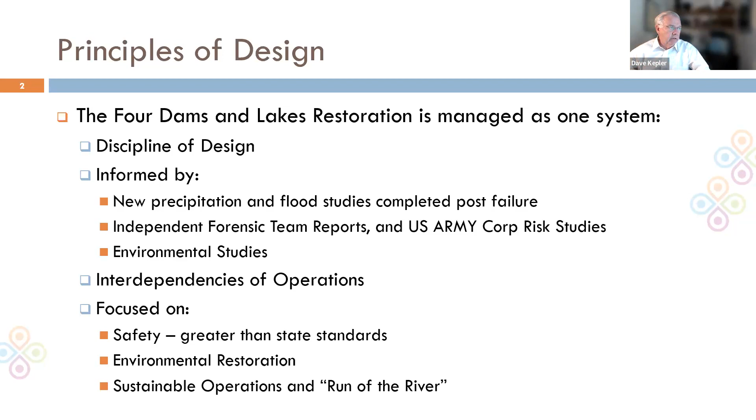The next slide shows the kind of timeline—for those who have been at our webcasts, you've seen those. We've spent the first 2 years in parallel doing both the design and a significant amount of recovery.

During that period, almost over $57 million were spent. We were doing the design as we were doing this management of recovery. That recovery phase is fundamentally done. The engineering is fundamentally done on actually all 4 dams now.

We are in the process of permitting, both Edenville and Sanford are nearing completion. Sanford is for sure, and we're submitting that, have been submitted. The other 2 dams are actually permitted and under construction. Currently we're looking at Secord and Smallwood to be under construction now, to be complete by the end of 2024, and we're looking for Sanford Dam and Edenville Dam to start this year.

Sanford is full restoration permitting right now. In Edenville we have some issues around endangered species and how the floodplain gets reported through FEMA, that it's still not all there, but we are doing the embankment, the things that relate to dam safety embankment this year, so we can be ready to pull that project. So it's the one that has a little bit more uncertainty of when it will be implemented, but if all goes well, we're trying to get that implemented by the end of 2025 or close to it as well.

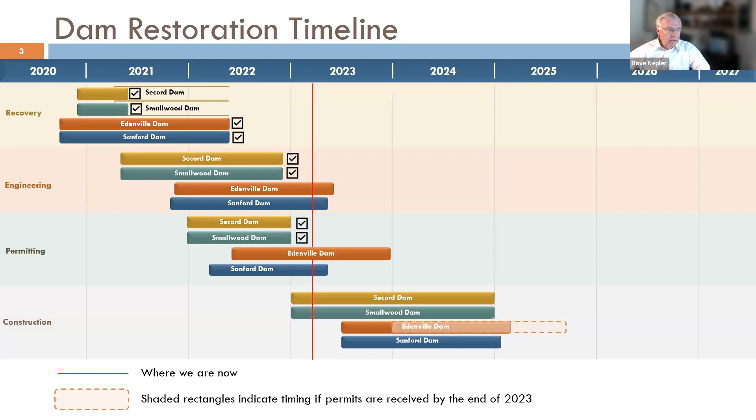So that's kind of where we are on the project. I think that's just to give you a perspective of why we're talking to you today as it relates to Sanford. And with that, I'll pass it over to Carlin, who's going to kind of cover the dam safety aspects and how we design the dams.

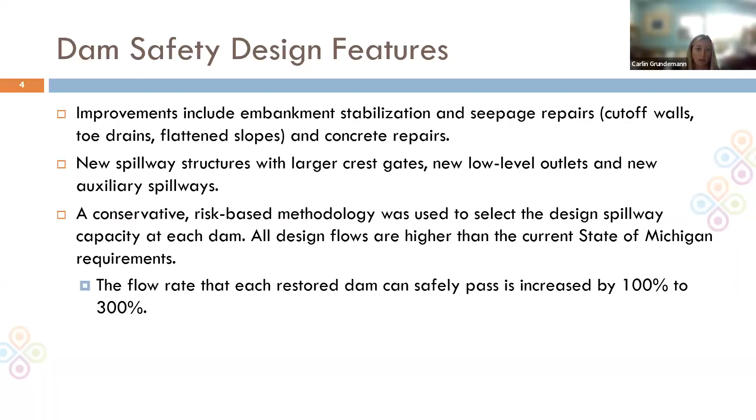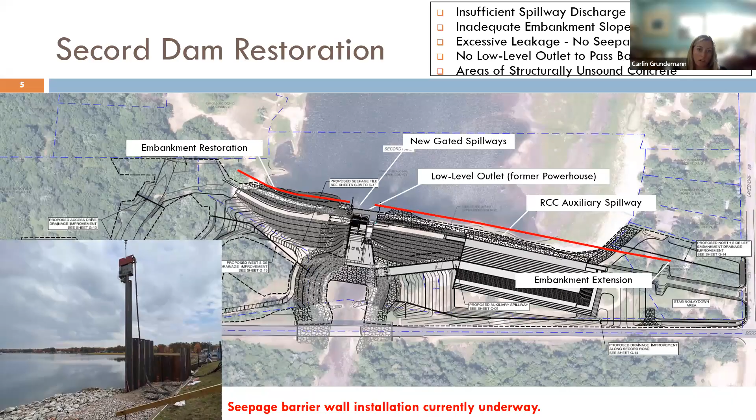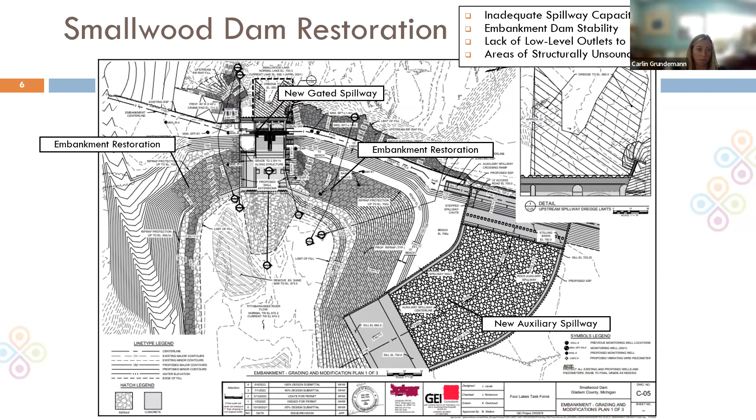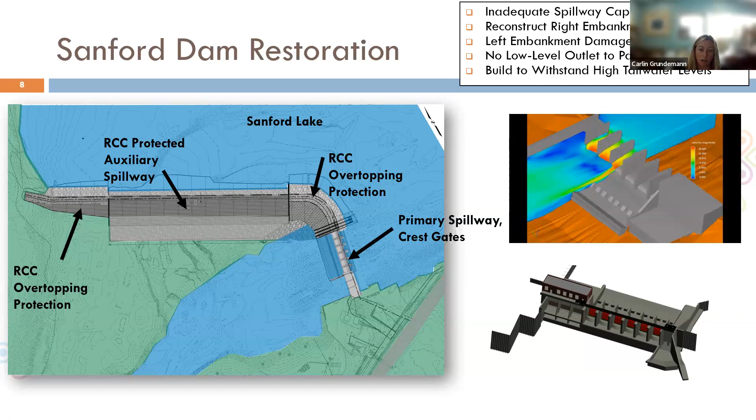I think I mentioned over the low level outlets here already. Yeah, so you can go to this. Yeah, that's okay. You can go back to that slide, this next one here.

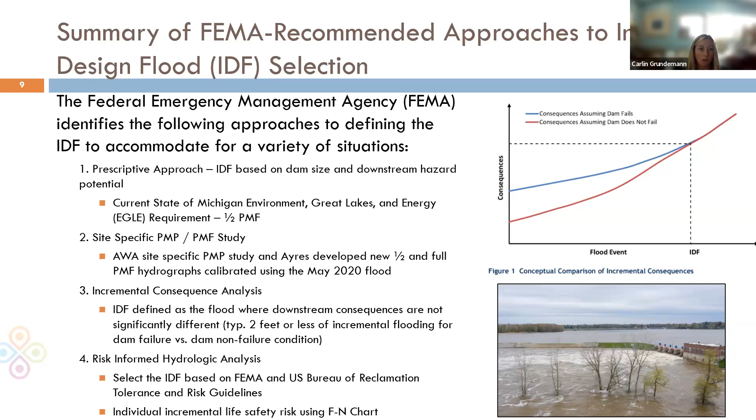So go ahead to the next slide here.

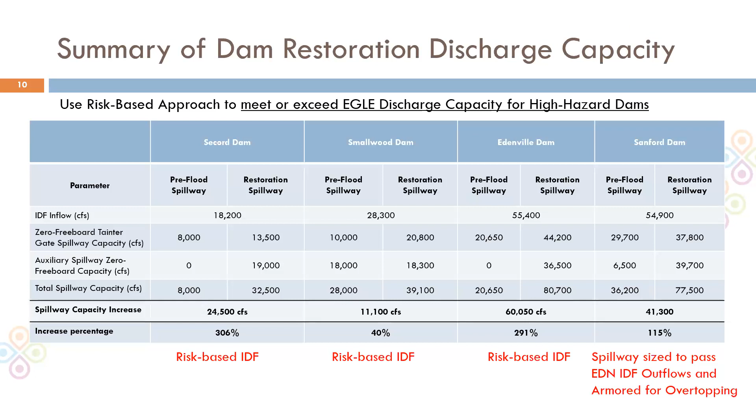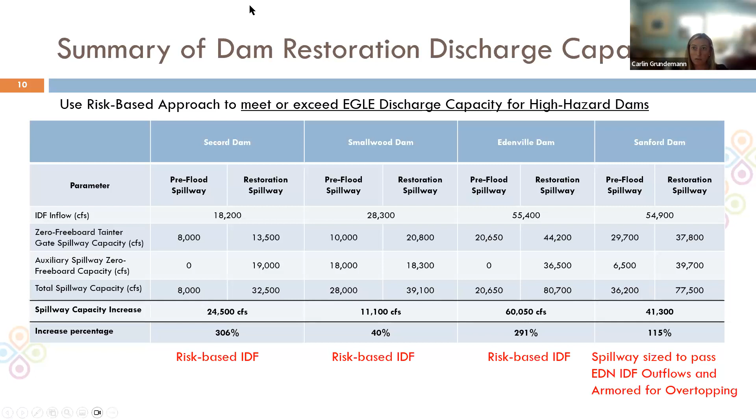The inflow design flood, Carlin covered pretty well. The next part of this that we want to talk about specifically is the floodplain portion. So when we say floodplain here, we're generally referring to the 100-year floodplain. That's the land that would be inundated by a flood event that occurs on average once every 100 years. Essentially, that's a 1% chance storm that would happen, so it's a 1% chance in any given year.

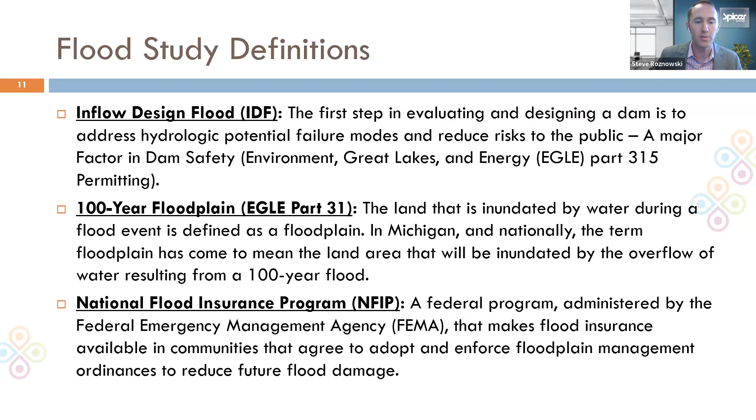We also have a definition here for the National Flood Insurance Program. This is the federal program that FEMA administers, and this is the program that generates those flood maps. So if you've seen a 100-year flood map, that's the program that generates those. So just a couple terms we'll be talking about here.

Want to get into a little bit of past flood studies and the flow rates we've evaluated here. There are two different tables here. The top table is for the PMF, the probable maximum flood. What we're trying to demonstrate here is there's three different studies that we've referenced: a 1994 study, a 2011 study, and a new 2021 study. That new 2021 study that Ayres and Associates produced includes flow information from the 2014, 2017, and 2020 floods. That information informs that there's a higher probable maximum flood based on the statistical analysis from those newer, larger storm events. So you're seeing an increase in that probable maximum flood calculation at each of those four dams.

On the second table, the bottom table here, we look specifically at the 100-year storm on those top two. Prior to the flood event in 2020, the published 100-year storms for each of those dams is listed: Secord, Smallwood, Edenville, and Sanford. And then the 100-year flow rate based on that new statistical analysis that Ayres and Associates did following the 2020 flood. And I'll point out in this next row, Edenville in particular, there is an estimate of the May 2020 flow rate that resulted in that Edenville failure was roughly equivalent to the 100-year storm. Downstream of that, the flow rates that were seen at Sanford Dam were closer to the 500-year storm as a result of the breach wave and the failure of the Edenville Dam upstream.

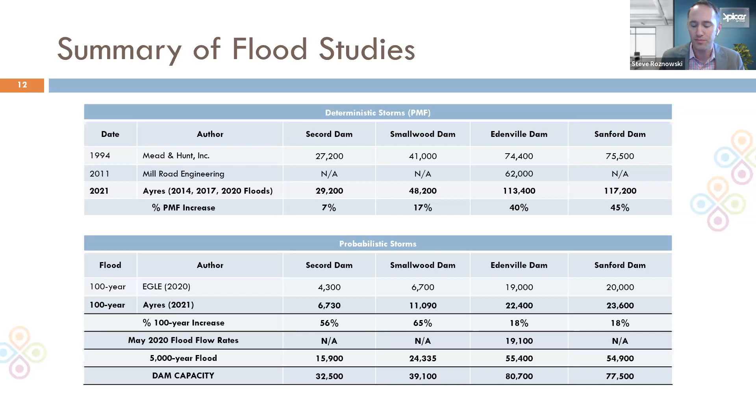So next, I want to talk a little bit specifically about Sanford Dam, primarily because, one, that's the most downstream dam, and two, that's the dam that's currently being permitted next through EGLE.

Looking at the flow rates coming out of Sanford Dam, we did do an analysis of what those flow rates would look like if the dams are installed as designed, these new safer dams that have this additional capacity, versus what it would look like if the dams were not reconstructed. Really, those are the 2 options that we have to look at. We can either create a safe dam or not install a dam at all.

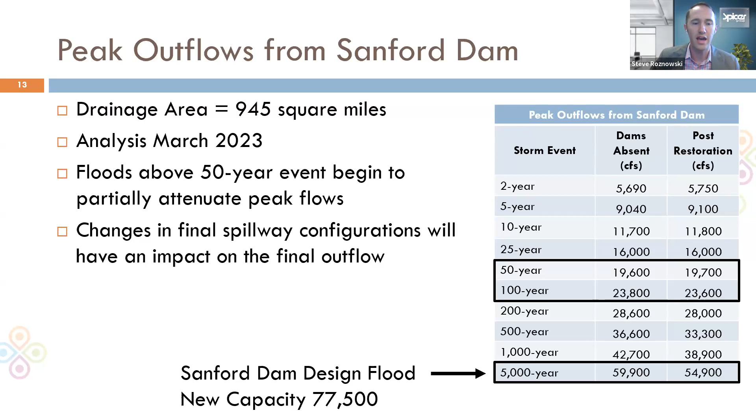And what you see here is that for storm events in that 50 and 100-year storm range, the flow rates, whether the dam's there or the dam's not, are effectively the same. Once you get up to some of those higher storm events, you do start seeing some reduction in the peak downstream, but these dams are not intended as flood control structures. The new dams are intended to essentially operate as run of the river. So flow coming in equals the flow coming out. And then at the bottom there, again, you have the new design capacity for the Sanford Dam relative to that 5,000-year storm.

On the next slide here, this is just what's called a hydrograph, showing the flow rate on the left and the time on the bottom for a storm event. The one on the left is the 50-year storm. The orange line is if the dams are restored. The dark blue line is if the dams are not restored and it's left as just a river system. And you can see that those flow rates and the timing of the storm is roughly the same. On the right-hand graph, you have the 100-year storm. There you see a slight reduction in the peak flow if the dams are restored, but generally trying to mimic that 100-year storm, whether the dams are there or not.

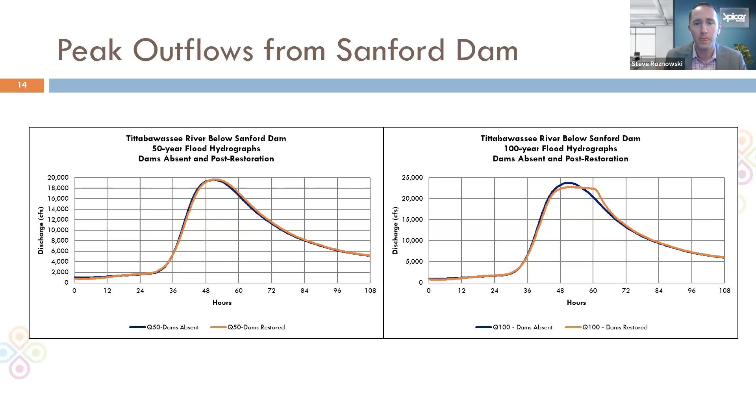And then lastly, talking about the floodplain permitting, this is under Part 31 of NREPA that EGLE administers. For that floodplain permitting, we demonstrate that the dams show no harmful interference upstream, that they're not increasing flood stage upstream of the dams, and that the flow rates, whether the dams are in place or not, are the same downstream of Sanford Dam.

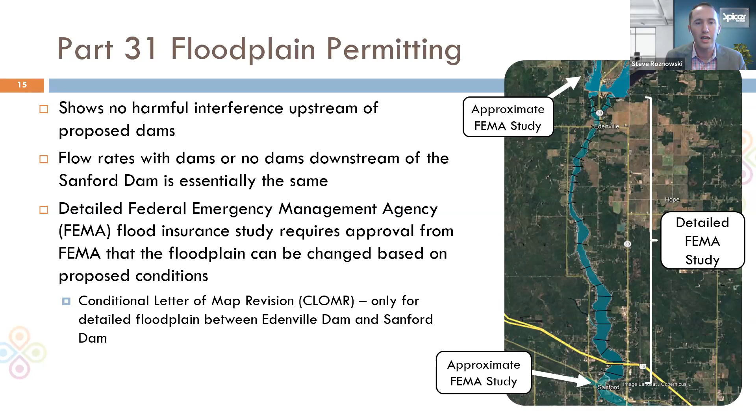One thing I do want to mention is that the FEMA flood insurance study does require approval for changes to the floodplain. And so there has been a conditional letter of map revision for the detailed floodplain area only between Edenville and Sanford Dam. So as part of the permitting process, that has been submitted to FEMA to potentially revise that floodplain in just that stretch between Edenville and Sanford Dam. And this map on the right just kind of shows those extents.

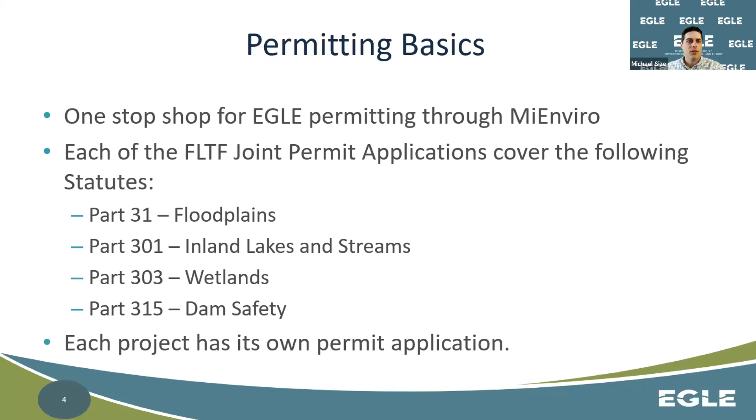So what are the state of Michigan's requirements for dam applications? For permit applications, all submissions shall include information that the department deems necessary to administrate the Part 315 statute. Information that's typically submitted includes site investigation reports, design calcs, historic records, as well as the design drawings and specifications that are prepared by a licensed professional engineer. Minor permit modification requests are meant to alter an existing permit and require similar information be provided. However, the timeframes are slightly different, as the department either approves or rejects the changes within 30 days after a request is made.

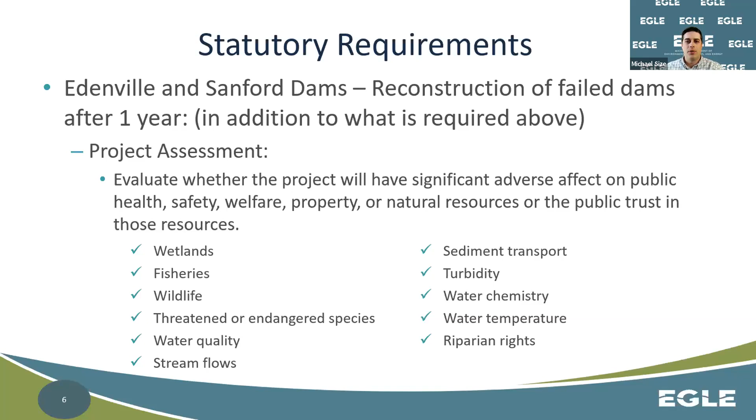So for the Edenville and Sanford Dam restoration projects, as well as all other projects, the department evaluates whether the work will have adverse effects on the public health, safety, welfare, property, or natural resources. So the dam safety program's role on these application reviews is with respect to safety, and we work with other personnel in our department to ensure that these other aspects are accounted for.

The design standards per the Part 315 dam safety statute state that the minimum spillway capacity required for high hazard dams over 40 feet in Michigan is half of the probable maximum flood, or PMF. And the Association of State Dam Safety Officials recommends that a dam have a capacity to safely pass the probable maximum flood or a lesser flow in which the downstream impacts of a dam failure are not significantly different than the non-failure condition, as mentioned earlier. So using an industry standard set by FEMA, the appropriate spillway capacity requirements for Secord, Smallwood, and Edenville were determined to be somewhere between the half and the 3/4 PMF.

And this risk-informed decision-making process allows a dam owner and regulators to consider the risks associated with the hydrologic performance of the dams relative to other dam safety risks. And in this method, a design flood is selected that assures a given level of tolerable risk is not exceeded. So the strengths of this method include providing dam owners and regulators the ability to assess the marginal value of increasing levels of flood protection against balancing capital investments in the risk reduction across a number of different failure modes.

And then the design standard at Sanford Dam is a little different. An incremental consequence analysis was performed and identified the flood for which the downstream consequences with and without failure are not significantly different, as covered by Carlin and Steve.

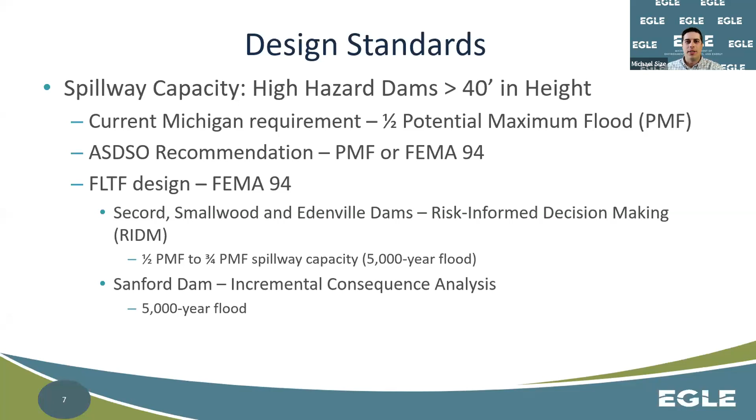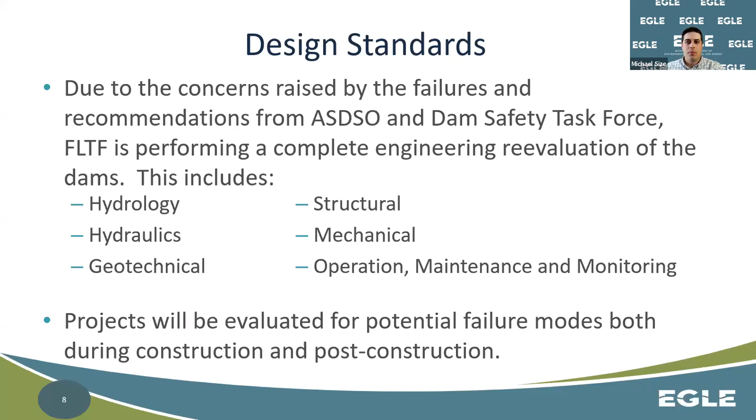So due to the failures and the recommendations from the Association of State Dam Safety Officials, as well as Michigan's Dam Safety Task Force, the Four Lakes Task Force is carrying out a complete reevaluation of these dams based on the selected IDF discussed earlier. And these evaluations include each dam's hydrology, their hydraulics, the geotechnical stabilities, structural stabilities, mechanical functioning, as well as their operation, maintenance, and monitoring plans. So based on the potential failure modes of each dam, a specific design, operation, and maintenance plan is created, and that ensures adequate protections are made. And also included for the department's review are the construction and post-construction conditions.

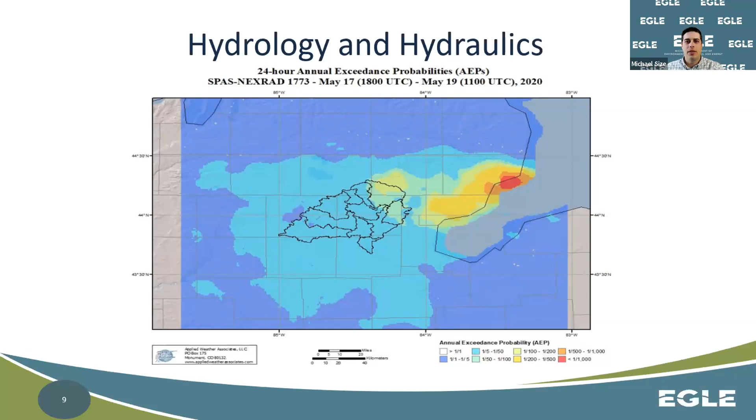So the dam safety unit reviews the hydrology at each project, the subsequent inflow design flood selection based on that hydrology, and the hydraulic design and performance of the spillway structures based on the IDF. So here's a picture of the rainfall data for the site-specific probable maximum precipitation study, or PMP, mentioned by Steve earlier, that Applied Weather Associates put together. And this in turn is then used to develop the IDF for each dam. And based on the inflows, the new spillway design is created and evaluated.

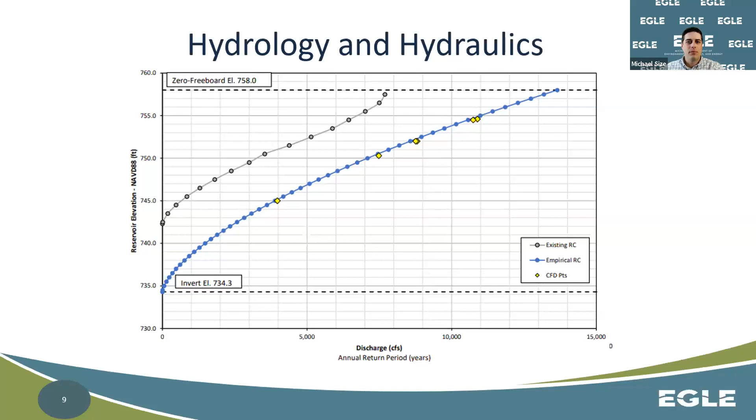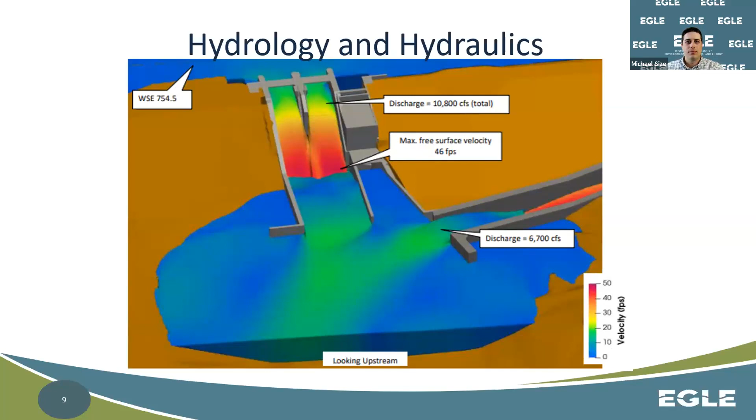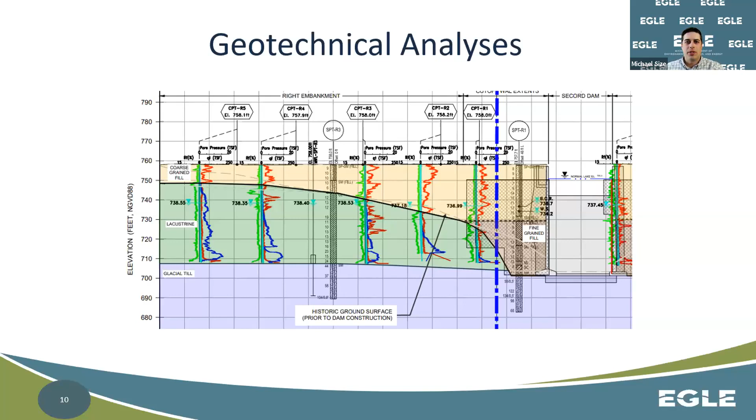So geotechnical aspects of a dam that are evaluated and reviewed by the dam safety unit are the embankment seepage and the stability. So a soil boring plan was performed to assess the existing geotechnical characteristics of the dam. And from the data collected in that investigation, models are created that assess the seepage gradient and slope stability of the embankment for the existing construction and proposed conditions. These model outputs are then reviewed to ensure that the appropriate factors of safety are met for the different impoundment scenarios.

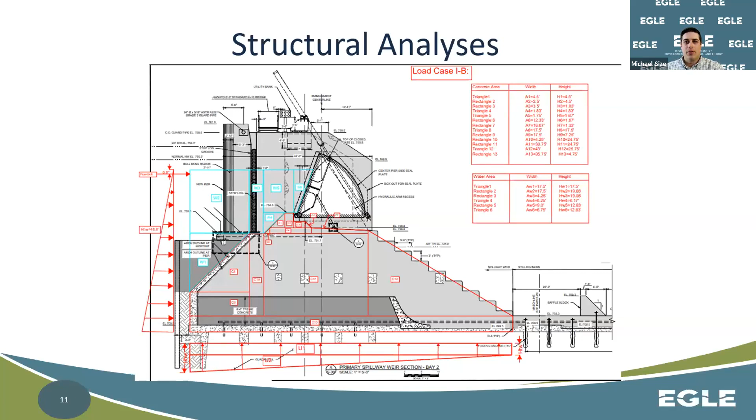Stability analyses are performed, and they were performed specifically on the spillway retaining walls, spillway overflow sections, concrete piers, and powerhouse structures. So using Army Corps of Engineers design references, the reinforced concrete designs were created to ensure that the minimum load factors were met for normal and construction conditions. And the bearing capacity of the foundation, as well as the settlement potential, are also evaluated in these analyses.

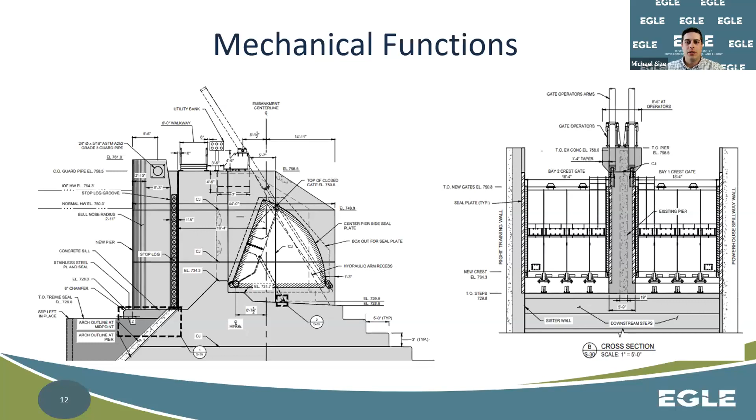The primary mechanical functions at these dams will be the spillway crest gates and the low-level outlets. So these components are assessed to make sure that there are redundancies in place and that proper failure conditions are established.

Lastly, an operation and maintenance plan typically comprises activities that the owner should perform on a regular basis. And these activities fall into the following categories: inspection, performance monitoring, maintenance, and emergency planning. So with proper operation and maintenance of a dam, the owner can reduce deterioration, prolong the lifespan of the structure, and protect the public.

So once all these facets are accounted for, reviewed and approved, then the dam safety unit can sign off on the application. And hopefully I made up a little bit of time.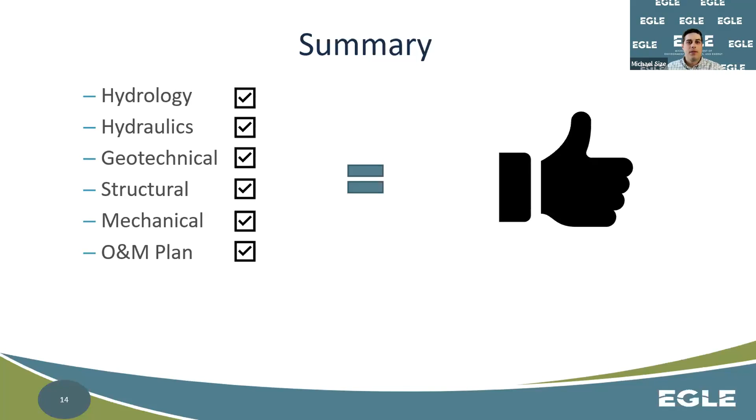And with that, I'll pass it back to Jared. Awesome. Thanks, Mike. John, you can start pulling up your presentation there. Just really quick, I'll introduce John Bayha. He's our floodplain engineer, actually out of Kalamazoo, but he's one of our most experienced staff in terms of the relatively complex sort of flood modeling that's going on here. And John's done a yeoman's job. So take it away, John.

Thanks a lot, Jared. John Bayha, as Jared said, the district engineer here in Kalamazoo. I'm helping out with this one just because of the nature of it and some of the complexities. So I'm just going to go through the basics here, what I'm thinking about when I'm reviewing some of this information, and a little bit of background about why we regulate floodplains. So bear with me.

So I seem to not be able to advance my slides, Ryan. Yeah, you might want to try one of the arrows, or the space bar might advance it for you if you're having issues, or click on it.

Yep, there you go. All right, so I'll gloss over some of this a little bit because I think it's pretty well covered already by Mike and others, but I'm going to touch a little bit on what's a floodplain, why do we care about it, what's a floodway, why is it important to manage floodplains, Michigan's Part 31 floodplain program goals, what is the FEMA flood insurance map, which I think we've already pretty much covered, and then get into a little bit on how we deal with the reviews for these projects.

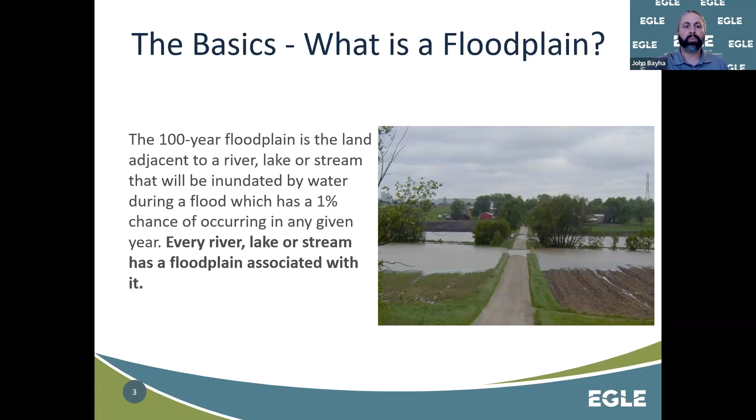So I think, as others have said, the 100-year floodplain is the land adjacent to a river, lake, or stream that is inundated by the water during a flood, which has a 1% chance of occurring in a given year. Now, obviously, for dam safety, they look beyond that, but for our regulations, we go up to the 100-year event. That is what we regulate to under Part 31. Obviously, every water body has a floodplain, whether it's mapped or regulated or not. So just be aware of that. Just because it's not mapped doesn't mean it's not there.

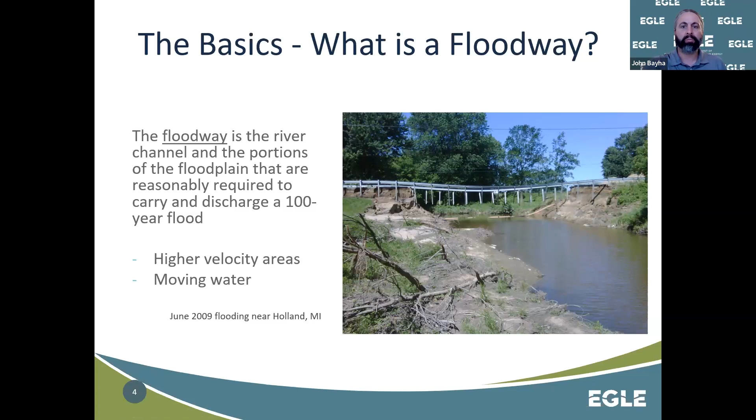Floodways: a river or channel and the portions of the floodplain reasonably required to carry and discharge the 100-year flood. So the floodway here has not been delineated by FEMA's mapping system, but it does exist. Every water body or river or stream has a floodway. And it's generally where most of the water is moving with such velocity that it could be dangerous to human health and safety. Structures built there could be in trouble, that sort of thing.

As far as why do we manage floodplains, I think everyone on the call knows something about this. Floods are the most common natural disaster in the U.S. and probably most of the world. About 200 Americans lose their lives every year from flooding, and 90% of all presidential declarations are from flooding. Approximately 6% of Michigan's land is flood prone, up to the 100-year event, including about 200,000 buildings. So that's a fairly large chunk of the economy that's at risk from flooding.

Undeveloped floodplains support many natural resources - wetlands, wildlife, groundwater recharge, that sort of thing. We've had some presidential declarations recently, and I think we're going to get some more in the UP coming up here soon, or at least at the state level.

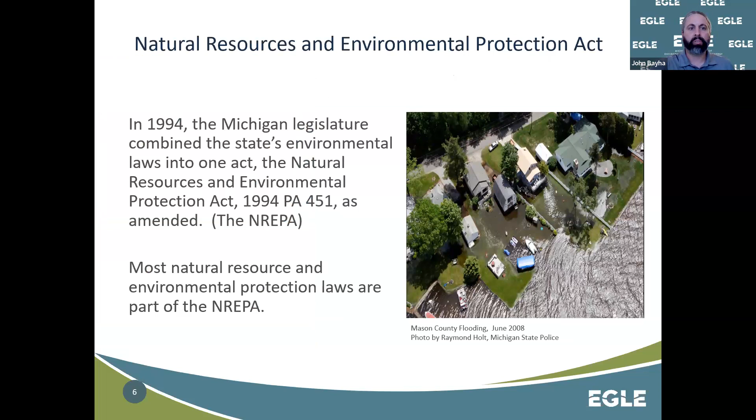I'm going to skip over this - I think we've covered what NREPA is at this point. I work for the Water Resources Division, and again I think we probably have a good handle on what that is at this point.

As far as the programs go, I think Mike pretty much touched on these, but I'm typically looking at these projects from the Part 31 standpoint. Obviously, they're being reviewed by others for these other regulatory programs.

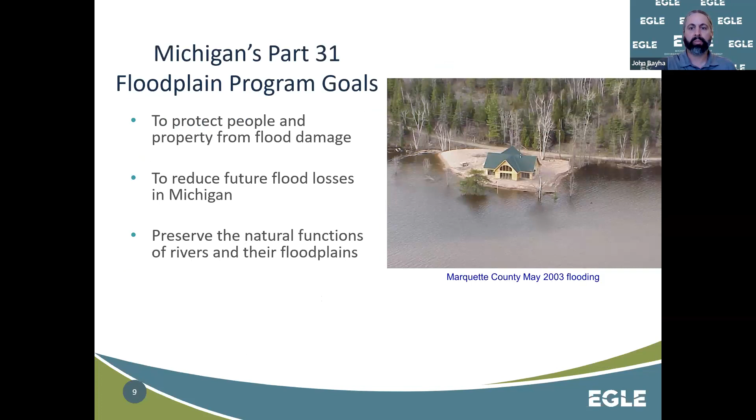Program goals of Part 31 from a floodplain standpoint are to protect people and property from flood damage, reduce future flood losses in Michigan, and preserve the natural functions of rivers and their floodplains. Under the state's regulatory authority found in Part 31, any occupation, construction, filling, or grade changes within a floodplain or river or stream with a drainage area of 2 square miles or greater requires permitting and review. So floodway development is especially important and takes a higher level of review.

Essentially a dam is a floodway development in some ways, so it is affecting the flood flows, it's affecting everything around it.

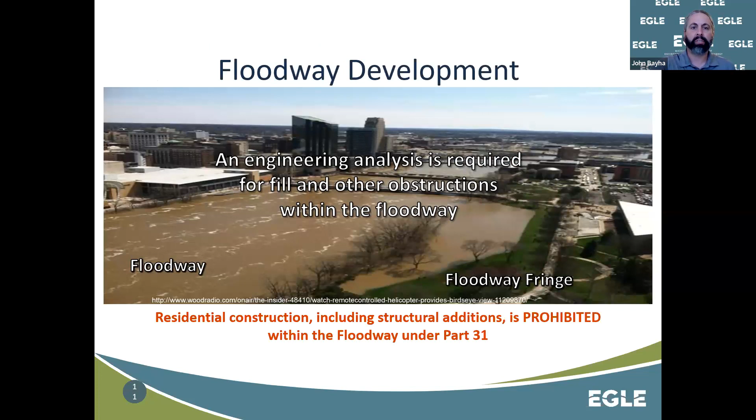I'm going to skip over this - I think we don't need to get into flood maps at this point. I think we've already touched on what the National Flood Insurance Program is. But from a Part 31 standpoint, we have to be especially aware of these situations where we're in an NFIP community and we're dealing with a FEMA detailed study area, which we are for a portion of this project.

This is a little wordy, and I apologize for that, but I'll kind of gloss over some of it or just touch on the high points. These are essentially my thoughts that I came up with as I was going through this process today and yesterday.

As far as Part 31 is concerned, all these projects are being modeled using HEC-RAS, which is the same program that FEMA uses to develop the FIRMs. Under Part 31, the modeling has to show no change or lowering of the previously established base flood elevations from existing conditions. So to permit something under Part 31, we have to be assured that the elevations of flooding are either going to remain the same or be lower. We can't permit something with an increase in flood stage or flood elevation unless those elevation changes are contained to the applicant's property, generally speaking.

For most of these projects, existing conditions refer to the pre-disaster conditions of all 4 dams and the surrounding areas. For Part 31 reviews, flood flows have been updated to match the current hydrology - I think Steve pretty much touched on that at length already.

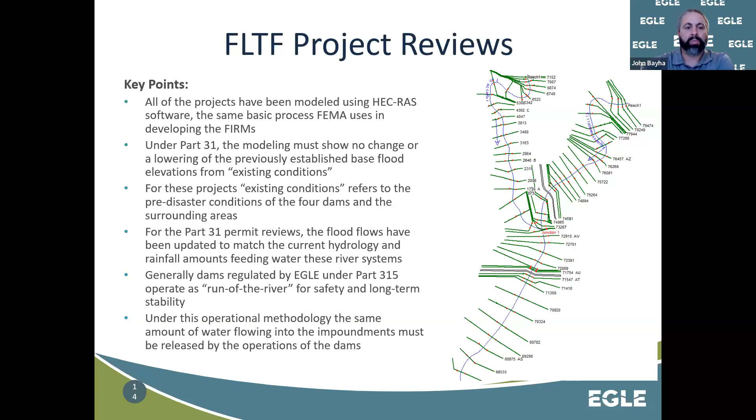Generally, dams regulated by EGLE under Part 31 or Part 315 operate as run of the river, as I think others have said as well. So under this operational methodology, the amount of water flowing into the impoundment must be released by the operation of the dam - we cannot retain a bunch of water.

In order to consider a Part 31 permit for such projects, EGLE has to ensure that the work will not cause harmful interference and will not increase flood elevations. This is typically demonstrated by modeling for projects impacting the river, channel, or floodway.

Part 31 review of modeling submitted for permit applications is an in-depth process and involves verifying all model inputs and outputs. That sounds easy, but this is really where we get down to the nuts and bolts of it. Generally speaking, when I'm looking at a HEC-RAS model, I'm going to go through everything in the model to the best of my ability, verify the outputs and inputs, make sure that the assumptions are correct. If I find issues with it or have questions, generally I'm reaching out to Steve - we discuss them, go through them, and figure out if anything needs to be changed, that sort of thing.

Existing conditions starting point is the pre-disaster configuration of these dams in all cases, which we established early in the process, with 4 lakes.

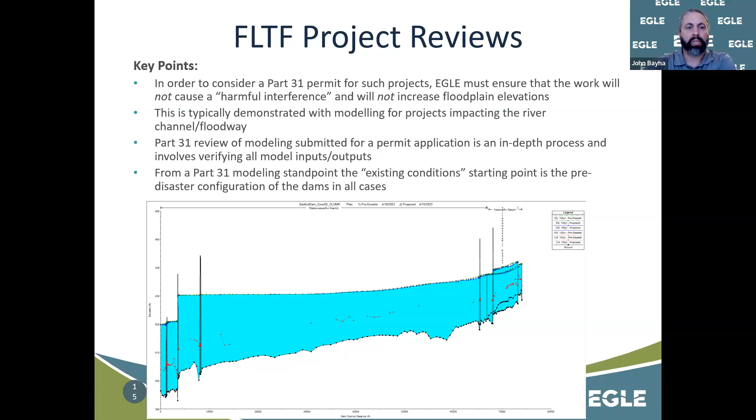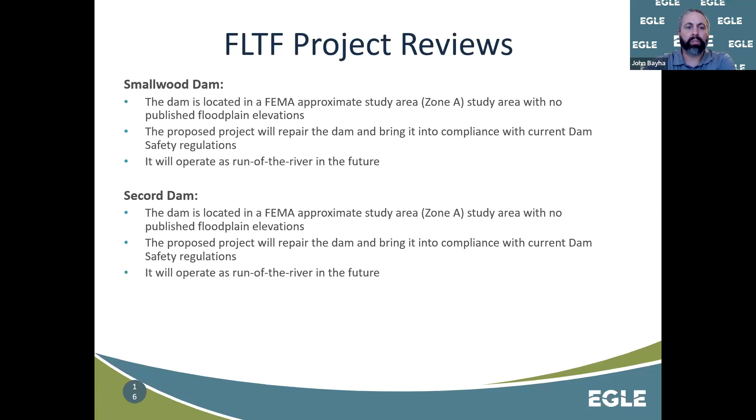These are pretty much the same. The Smallwood and Secord dams are very similar as far as how we approach them from a Part 31 standpoint. They're both in approximate zone A areas, so that makes it a little easier to deal with from the FEMA regulation side of things. They're both proposed to be repaired and modified to meet current standards.

The Edenville Dam is located just upstream of a detailed study area, which Steve mentioned earlier. That one needs to go through the conditional letter of map revision process with FEMA, whereas FEMA is going to review the modeling. I've already reviewed it. They will concur or ask questions and go through it because there's potential for that one to change elevations between the 2 dams, the Edenville and the Sanford Dam.

The Sanford Dam is located just downstream of FEMA detailed study areas. So we have been able to avoid a CLOMR on that one, but there will be additional things required from FEMA, and they are reviewing that as well.

So a little bit of a summary here, I guess. Following the failure of the dams, I think as others have mentioned, the area is fairly unstable. Leaving it as is currently is not really an option. Significant impacts to the floodplain and floodway often require hydraulic modeling, which we've gone through on every one of these so far.

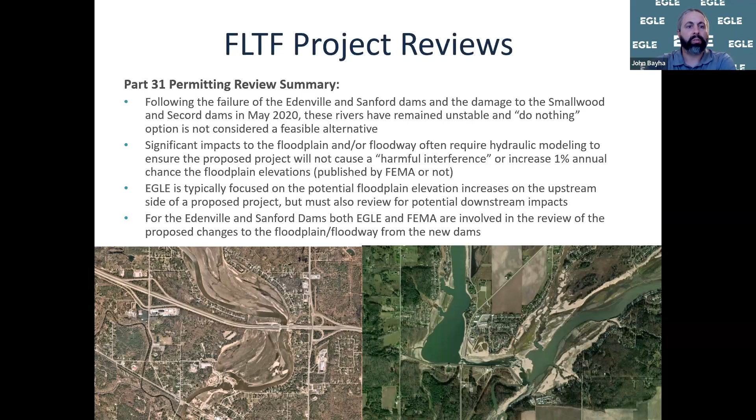We're typically focused on potential floodplain elevation increases on the upstream side of a proposed project, but we also need to look at them from a potential for downstream impacts, which I think is what the premise of most of tonight is about. For Edenville and Sanford dams, both EGLE and FEMA are involved in the review of the proposed changes. So we're both reviewing those. FEMA has their process, we have our process, and so on. I think I already touched on that.

I guess I'll hit on this point. EGLE cannot issue a permit for a project that increases floodplain elevations from existing conditions, on neighbors' properties, or structures. So all I'm trying to say there is, we cannot issue a permit when there's potentially increases on insurable structures or other properties not owned by the applicant.

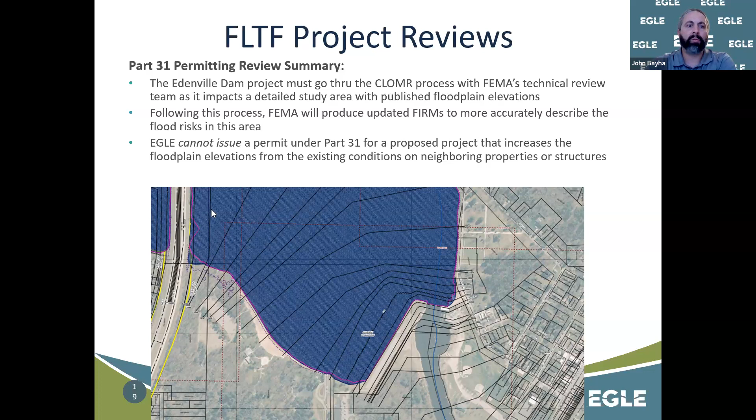And I think we've pretty much touched on how these dams are going to be operated, run of the river. Yeah, I think that's it. As far as questions, I know we're going to go through a bunch of questions tonight, but if you have additional questions, you want to talk about something, just feel free to reach out to me anytime. I will get back to you if you get my voicemail. And I think that's all I had, Jared.

There we go, I'm unmuted. Thanks, John. Sorry, I was typing an answer to a question, so I got us a little behind. No, no problem, I probably went through that a little quickly. No, that was good, thank you.

Jacob Brand is going to talk a little bit about, it got mentioned earlier, but we have a permitting database. And so he's going to talk about ways that you can participate in the upcoming public notice process and make sure that your voice is heard during that process. So go ahead, Jacob. Yeah, as Jared said, my name is Jake Brand.

I am the environmental quality analyst that has been assigned to Midland County, and I'm going to be speaking about the public notices today. Once EGLE has gone through and reviewed all of the applicant information and we've deemed it administratively complete, there are two main processes in which the stakeholders can become involved. The first of which is that public notice period. It's a period that typically lasts 20 days, and the stakeholders within the region who are going to be impacted by the project, or if people want to make comments outside of the project area, they're able to do so.

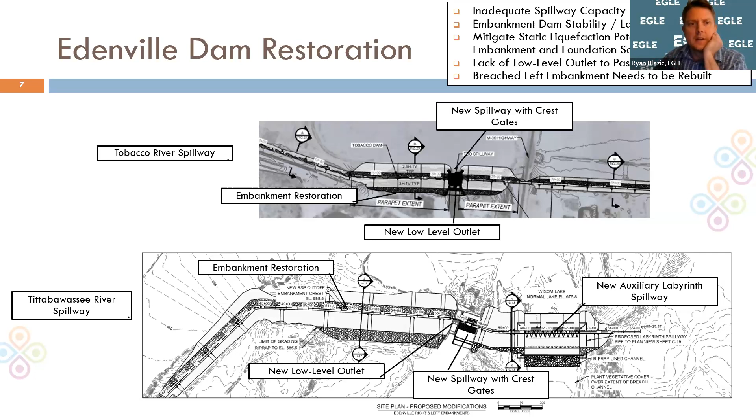Yeah, I have a good one here. And this one's probably for Mike or Luke. So this is related to dam maintenance. So what's in place to ensure the dam owner maintains a high level of maintenance compliance? And what happens if they don't keep up with that? And what are the limits or action points if they don't keep up with maintenance of the dam? Can you speak to that at all?

We were playing chicken there to see who would go. Just trying to find the mute button. Go ahead, Luke.

So for part 315, and this is a part 307 structure, there are inspection report frequencies required. These being high hazard dams, an inspection report needs to be submitted to the dam safety unit currently every 3 years. As Jared alluded to earlier, we are trying to increase that frequency with new legislation, and should that pass, it'd be a yearly inspection cycle. So we would be apprised of the dam's current condition, any deficiencies, and would be working continuously with Four Lakes Task Force to make sure any deficiencies are adequately addressed.

I would just add that there's a regulatory requirement you're defining. We've advocated for greater frequencies and standards just like you have, and the Association of State Dam Safety Officials have a viewpoint too. We're trying to follow those guidelines to be elevated a little higher than what the state aspires to, and hopefully the legislation will catch up. But we'll be in compliance or better than that. We've brought in people with expertise in dam operations to help us build this up, not just local people writing this.